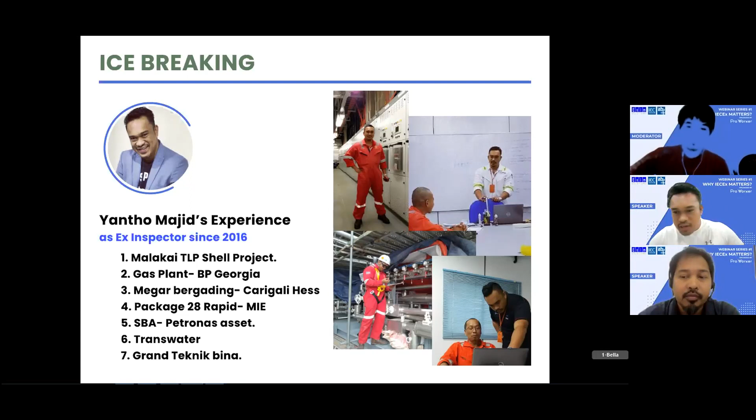Ketika itu saya belum punya IECEx kompetensi, jadi waktu orang-orang foreigner datang ataupun orang-orang yang punya kompetensi itu, kita lihat mereka, wow mereka ini hebat sekali. Kenapa saya ceritakan ini? Supaya kalian berminat. Sebelum kita masuk ke slide seterusnya, nanti colleague saya, Mr. Suhaili, akan terangkan. So everybody, are you okay when I speak Indonesia, English, mix a little bit? Is it guys, are you okay? Okay ya, sounds good.

Jadi pada waktu itu saya merasa bahwa saya sudah cukup bagus, tahu segregation gimana, pulling cable, running tubing dan install of equipment. Nah, pada waktu kami melakukan pekerjaan di Malaysia, waktu proyek Gumusut Kakap, saya melihat banyak bule-bule yang datang, foreign coming to Malaysia, and they have that expertise as EX inspector. I'm also surprised that time because we work very hard, and I saw them also come to site, but they just bring a piece of paper, or they just bring their tools and take photo and then go back to the office. Aku jadi tertanya-tanya, what actually they're doing.

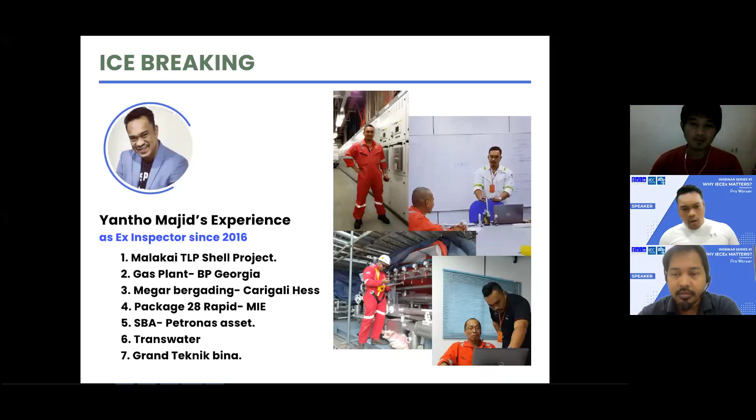Aku tertanya-tanya, apa mereka punya posisi? Kenapa cuma datang di site, ambil foto dan pulang ke office. Waktu itu saya bekerja dengan Pak Gorga juga, yang punya Pro-Workers saat ini, sama-sama waktu itu. Jadi saya mulai tertanya-tanya, dan ya biasa, kita manusia, we are human, we wanted to know. Aku suka bertanya, aku tanya sama bule itu, temanku juga, itu apa posisinya?

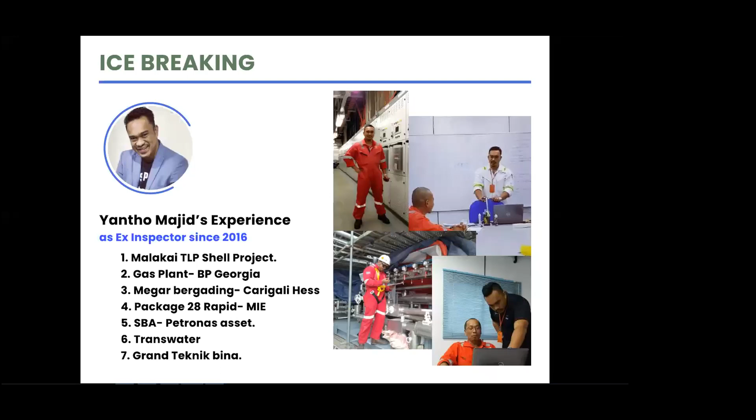Why I encourage you guys about IECEx, is because this will drive you to a place you never thought before. Kalau kalian sudah punya IECEx, I do believe you guys will be in the market.

Yeah, there's Bernardo, there's Pak Jontri, there's a few guys in this line at the moment that have certificate from Australia. They are very valuable in the market. Mereka bisa demand berapa gaji.

Kalau kita yang tidak punya sertifikat kompetensi, kita nggak bisa demand apa-apa. Jadi kalau kita cuma melihat orang datang dan mereka able to do this, tapi kita nggak bisa. Kenapa? It's about competency.

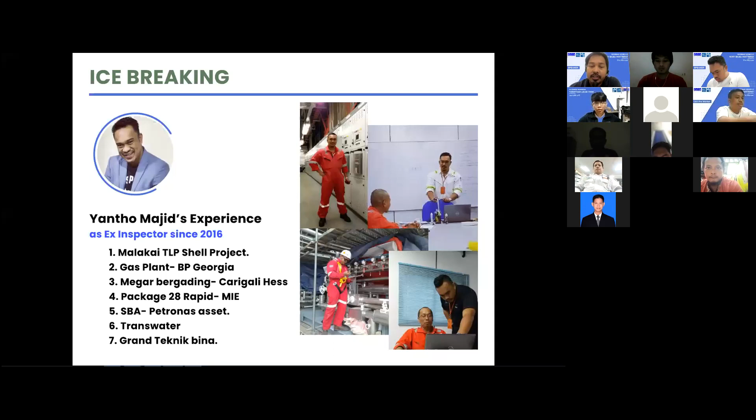Actually, we are the first pioneer of IECEx in Malaysia. Mr. Yantho joined us in 2016, but as a pioneer in Malaysia, I started in 2008. As a pioneer, I did a lot of work to build the IECEx scheme in Malaysia, including assisting SIRIM in Malaysia to build their certification body certifications.

Tonight I'll brief you about the requirements on hazardous areas. As my colleague said, IECEx inspector requirement is growing day by day in today's industry, especially in oil and gas. We see tremendous requirement for that particular position. For the time being, IECEx inspectors are in very short supply all around Southeast Asia and the world.

So before we go into how to obtain the IECEx certification, let me give you an overview of what hazardous area means. As we can see in the slide, hazardous areas are actually around our vicinity, in our day to day activities. You can see this tanker doing bunkering operations of fuel. This process involves flammable substances, whether diesel, gas, gasoline, or whatever substance, involving vapor and gas within that process area or vicinity.

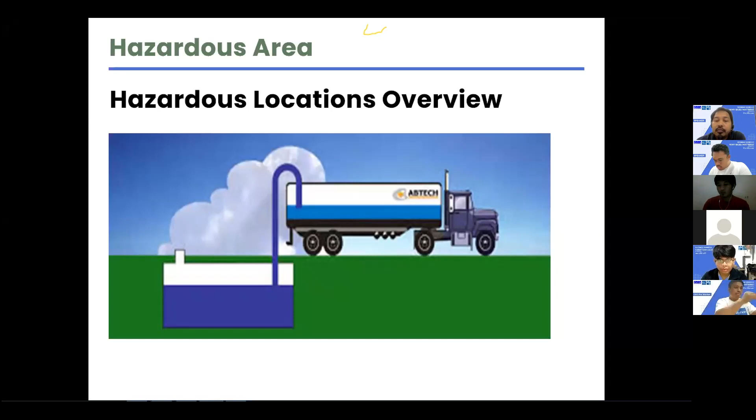If this leads to explosion, it potentially involves industries listed here: oil and gas, drilling, fuel storage, car manufacturing, power generation, distillery, aviation, painting, water treatment, even food manufacturing. If you browse YouTube, you'll find food manufacturing also has potential for explosion in their process, like baby powder or baby milk powder, which can be linked to explosions as well.

This industry will grow, and as Pak Yantho said, the requirement for that particular inspection will grow tremendously. That requirement will increase all over the world, not only in our region. Because why? Okay moderator, next slide.

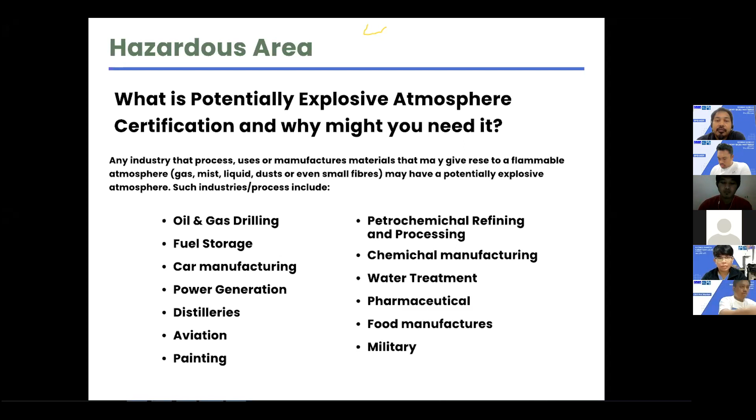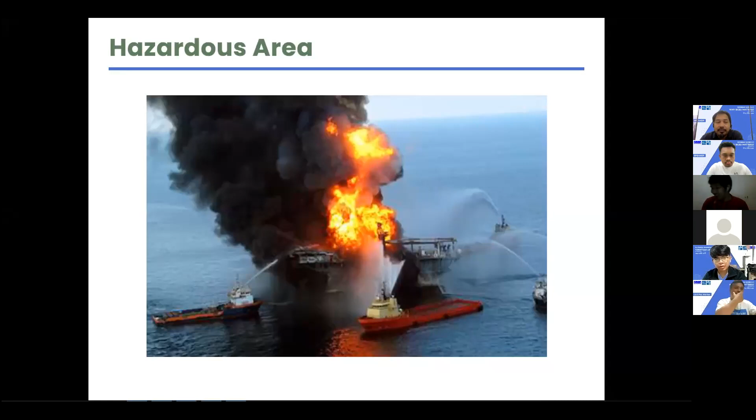Because of small matters, the company doesn't want to pay the EX inspector for the inspection schedule, but that is the cost they will have to pay about the disaster. This is why, as Pak Yantho said earlier, the EX inspector is getting high paid for that particular expertise, because the plant owner or company wants to avoid disaster, and they also want to avoid the loss of capital - the money matters.

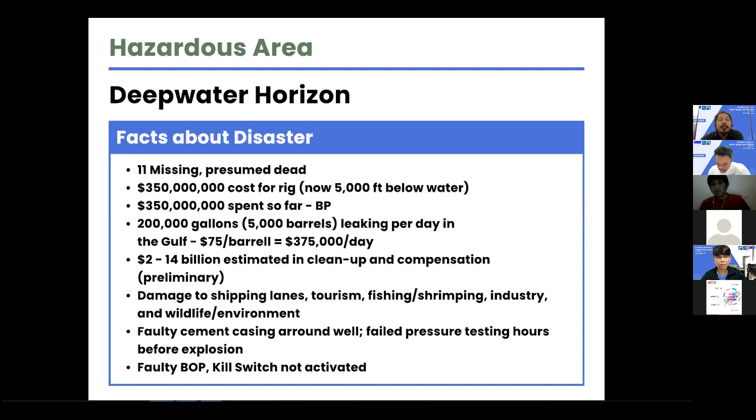Okay, all right, the next slide.

That's why we need to understand the fire triangle in basic safety concepts. The concept is we need to eliminate one of the elements to break the triangle. So this EX explosion or EX protection method is about how to mitigate and control this fire triangle through engineering practice or engineering design.

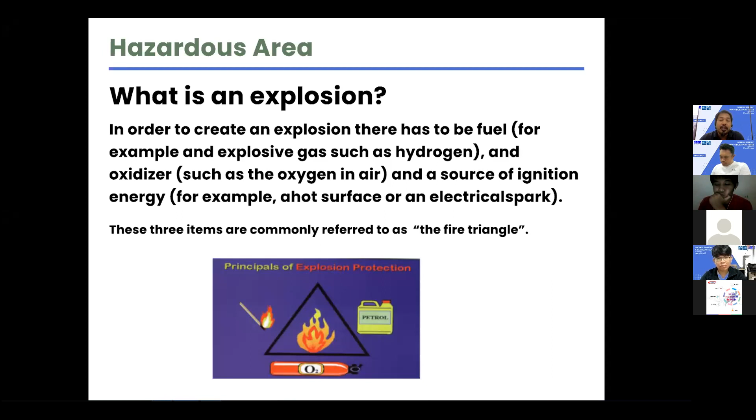All right, because of the physical properties of the flammable substance, they have a lower and upper limit level. For example, LEL - if the presence of the vapor or gas is not sufficient in the atmosphere, ignition will not happen. This is the meaning of LEL. It means that even if the fuel is present in that area, if the amount is very small, the ignition will not happen - there will be no fire.

Okay, that's what LEL means. Then we go to UEL, upper explosive limit. This means if you have the flammable substance but the concentration is very high, this also will not lead to ignition happening. It means if the fuel content is too concentrated or the concentration is too high, it will eliminate the ignition - there will also be no fire. This is a basic property of the material itself, something you need to understand beforehand - why this flammable substance behaves like this physically.

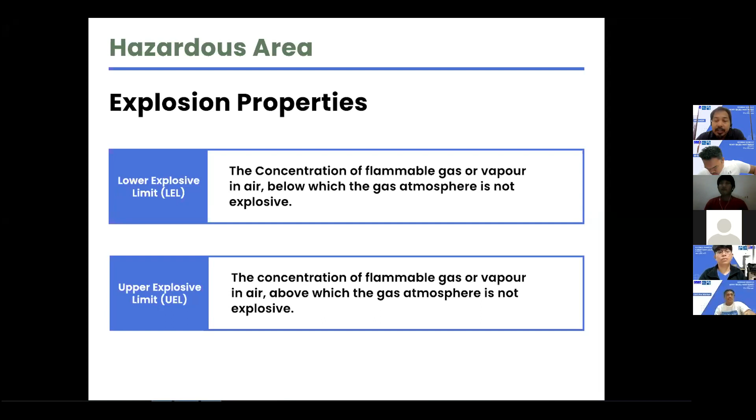This means if we have several materials or several types of gas present in an area, these have already been studied physically by physicists - the LEL and UEL of each compound is different between them. This is a particular value already studied by scientists or petrochemists.

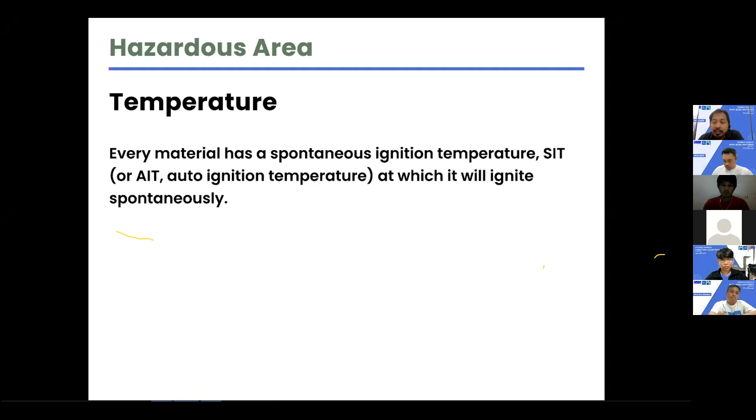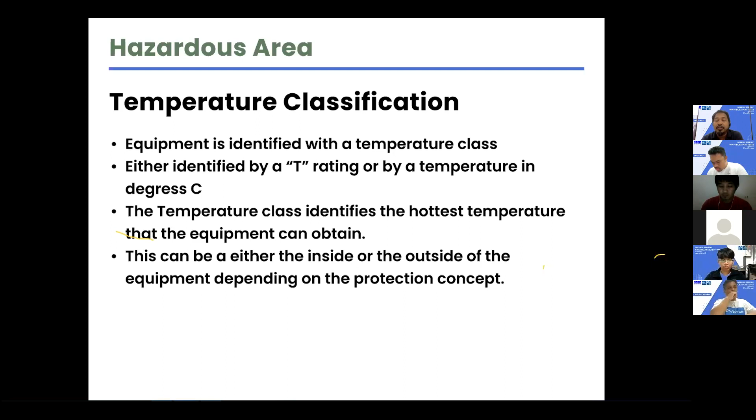Okay, this is a particular of temperature rating. We call it hazardous area classification. Before that, we need to identify the material, everything in our process area. That's why we need to do this system, we call it hazardous area classification.

We can see T1 here. T1 will be referring to 450 degrees C or 842 Fahrenheit. This will be classified as what the gas type or material type will be in self-ignite, or AIT, at that ratio of temperature. It's the meaning of T1 of the hazardous area code.

And so on, we have T2, T3, T4, until T6. T6 is ranging from 85 degrees to 100 degrees C. This is a very flammable material actually. If that hazardous area is classified as T6... but in actual process area, we rarely see hazardous areas classified as T6. Normally we use T3 or T4.

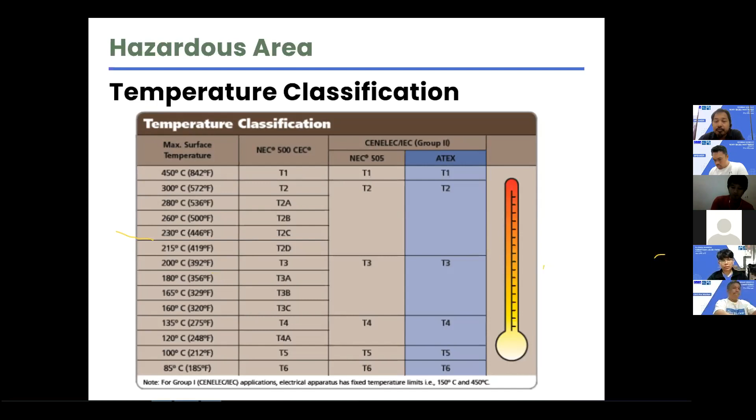Okay, next slide. This is a typical temperature class that will be classified by petrochemists. This will be referred to IEC 60079-20. If you refer to the standard, you can get this particular information in the standard as well. This particular standard you can refer to.

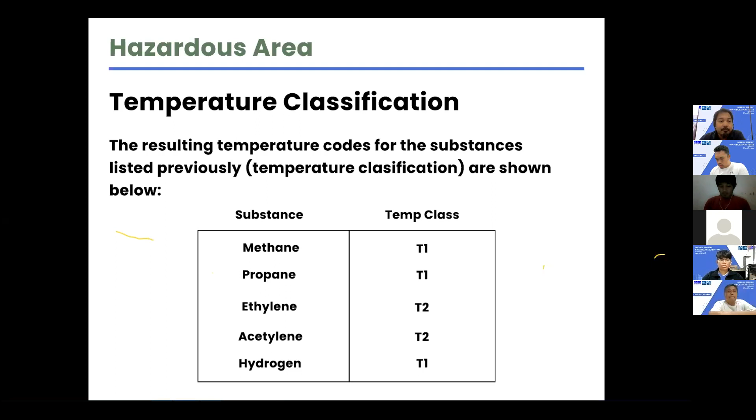Okay, next slide. Beside the temperature class, if you have a gas area, where the process plant involves gas or vapor, normally the hazardous area classification will be separated into subgroups, or we call it gas grouping. We have group number 2, group number 3, and group number 1. For group 2, we divide into 3: 2A, 2B, 2C, which means the group bearing, or what it means, depends on its own subgroup.

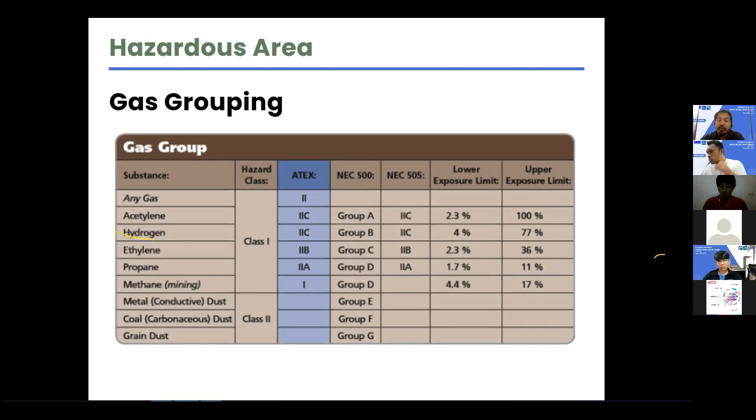Also, some element to consider is the energy level of this substance - how many joules or how much energy level is required to ignite this material or gas. This is only a basic explanation. These are only basic explanations. If you want more detail, that will be explained during the training if you enroll. We can elaborate more on how they simplify or group this hazardous area. Okay, next slide.

For summary, how this gas group will be classified or segregated is because of their risk tendency. As you can see, gas group 2C, 2B, and 2A - 2C is a higher ranking. Because of what? Because of, as you can see down below, the energy level and the LEL and UEL. This means gas group 2C has more tendency to ignite, even though the environment condition there will lead to explosion risk.

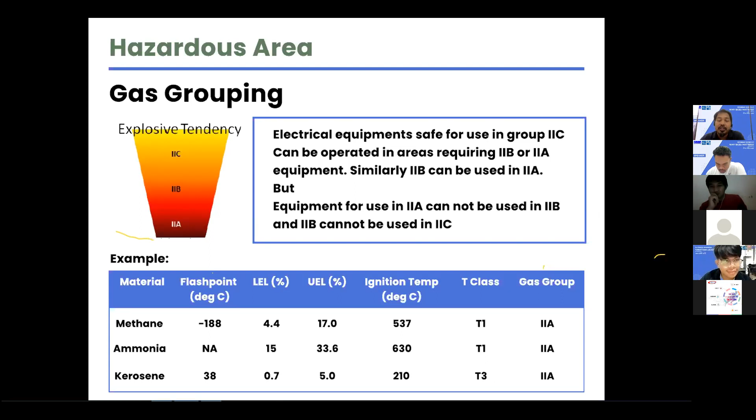Then the risk is more reduced when the material is grouped in 2B, and even less risk when the material is classified as 2A. This can also be elaborated during the training as well, how they classify this. In this seminar I don't think there's enough time to elaborate more. Not enough time to elaborate more actually. If you ask questions, we can do some basic summary explanation. Okay, next slide.

All right, area classification - last but not least, we call it zoning. Why do they classify it as zoning? Because we want to identify the critical risk of this area. You can see in the slide here, we have zoning, character number - Zone 0, Zone 1, and Zone 2. Zone 0 means that particular substance or gas is present continuously in that area - it means all over the area, the material or gas is present there.

Then for Zone 1, it could be present intermittently, which means sometimes it's there, sometimes it's not there, like that.

This calculation must be done by the engineer. That's why they classify it there.

Zone 2 has less risk compared to zone 1 and zone 0. In zone 2, the material or gas is present abnormally. Normally the material could be present if something goes wrong in the process, like a leak, or in a place adjacent to zone 1. This will also be classified as zone 2.

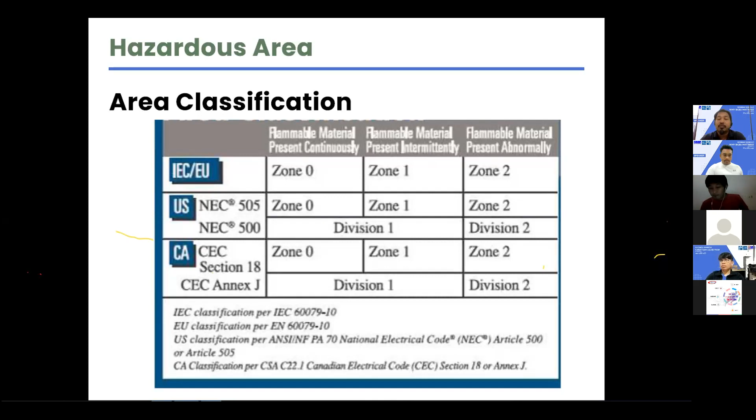This is why this area classification must be established in the plant. Remember, we need to address safety first, and this should be one of the safety parameters we look into.

We have the class and division system. As I said before, whoever is familiar with the NEC system knows it could be class 1, division 1 or 2. Combustible dust is a different class, class 2, division 1 or 2. Flying fibers and combustible dust might be found in the coal mining industry, food industry - like I said before, the meat industry - and flying fibers, this might be the cotton industry as well.

And then the zone system - this system is used particularly by IECEx. For gas, mist and vapor only, the particular zones are zone 0, zone 1, zone 2, and for dust we use zone 20, 21 and 22 as listed below.

This is the subgrouping, as I told you before on the previous slide. It's a hierarchical system chart showing how the group is subdivided. We focus on group 2, which is more towards gas and vapor, while group 3 is more towards dust industries. Because of oil and gas, we get more involved with this subgroup, group 2A to B to C.

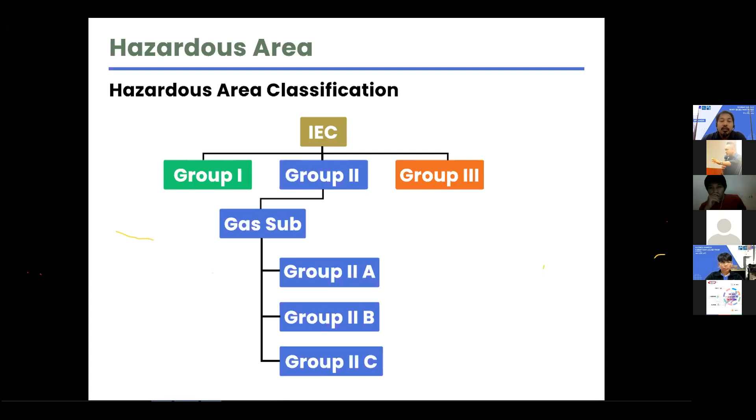This is a summary. If you go up through the training, this is the particular engineering control established by IECEx, or how to achieve risk control through engineering practice or engineering design.

You have many equipment types on site, especially electrical and instrument equipment. You can see explosion-proof equipment, which we commonly call EXD. This particular equipment eliminates the spark or energy level that could ignite the hazardous area.

As we understood before, your particular area might be classified as zone 0, zone 1, or zone 2. This particular equipment is suitable for zone 1 and zone 2 - it has been designed to cater to the risk in those zones. That's what we call explosion containment, a method of general principle.

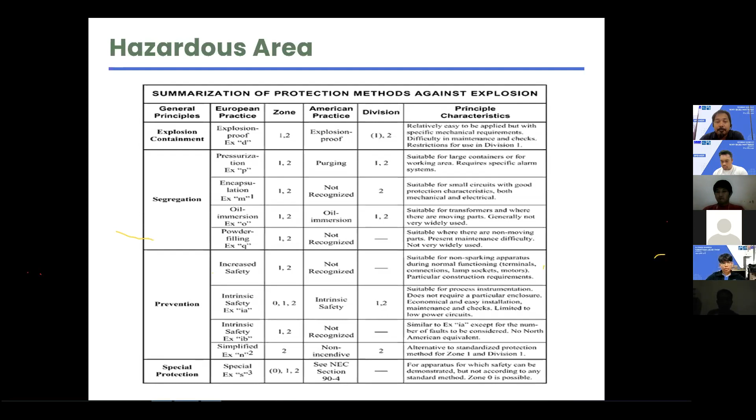Okay, next slide - this is a particular equipment actually. Right, we go to the IECEx scheme. Once we know the equipment or hazardous area requirement, then we go to this IECEx scheme. What does IECEx scheme stand for? What does this scheme actually do for us or for the industry?

Actually, this scheme is established to address manufacturing and the standards - how the manufacturer needs to get the standard reference they have to use, and then maintain the originality of the certificate. This is very important because in the market now we have a lot of so-called Ex certified equipment, but some equipment only follows their particular country's standard. Let's say we have China-made motor, but that electric motor is manufactured or designed according to China standard, which might not be accepted by other countries. The IECEx scheme overcomes this particular problem.

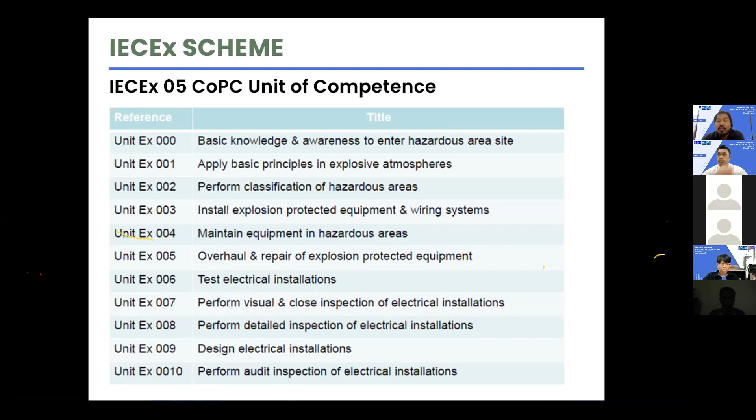Different competencies are also offered by the IECEx scheme. Unit 002, perform classification, is normally for design engineers and for design of electrical installation - I obtained this unit once because I was doing electrical installation design, so I required this unit. And then there's unit 010, perform audit.

Now, limitation of scope. As explained in the previous slide, there are different types of protection: Ex d, Ex e, Ex s, Ex i, and so on. For obtaining this certificate, you can select the type of protection you are familiar with. Let's say you're only familiar with 3 protection types - you don't want to obtain all these protection types because you need to learn more theory on how that equipment needs to be constructed, inspected, and installed. So you can select, for example, Ex d, Ex e, and Ex i - 3 items only - and then you can select these on the particular assessment.

Also the product type - let's say you are familiar with rotating machine or switchgear, you can select this type of machine, type of product only. Group also we can select; normally in oil and gas industry, we can select group 2 only, so the question of the assessment will not include mines and dust. And then the limit of range of voltage - this means if you're not involved in high voltage industry, you don't have any familiarity with high voltage industry, you can select only low voltage. Then the question on the particular examination that you want to apply will be limited to the familiarity of your experience actually.

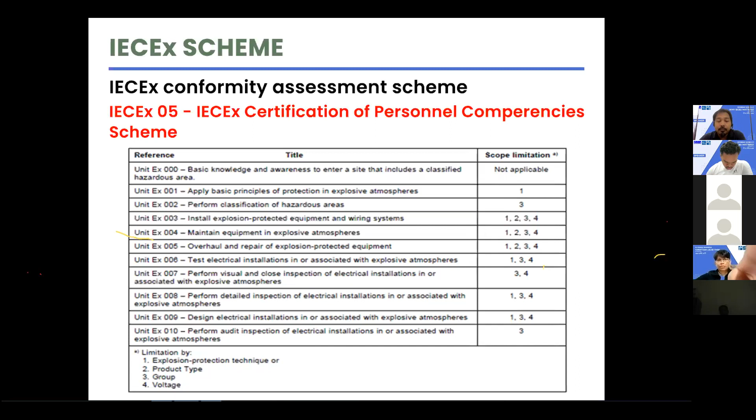Next slide. Okay, what is the assessment criteria actually? As a pioneer in Malaysia, we have done this assessment quite extensively since I have been involved in this IECEx assessment from 2012, and we worked with a few CBs. Then we know how to prepare the candidate, what performance criteria needs to be achieved before you go to the real assessment.

The first element is you have experience or knowledge of how to prepare work in a hazardous area. Number one is nature of explosion hazard - you have known from the previous slide that we told you about the fire triangle and everything. This is useful information. What is a fire triangle actually? That will be asked in the examination. How about the critical aspect of evidence - let's say you have conducted the work permit and clearance procedure and SOP, everything. This is a general requirement on this particular competency assessment.

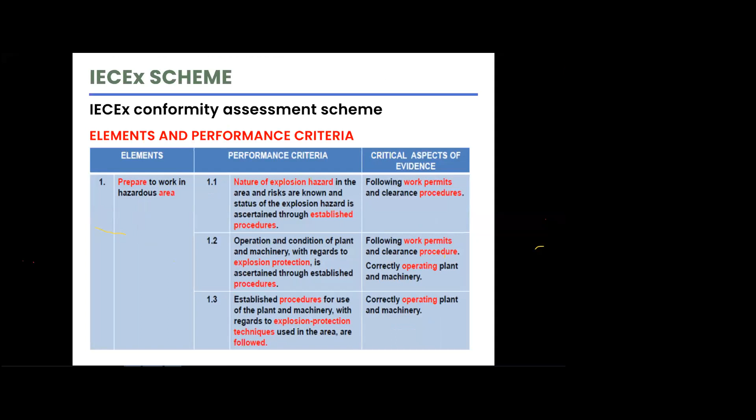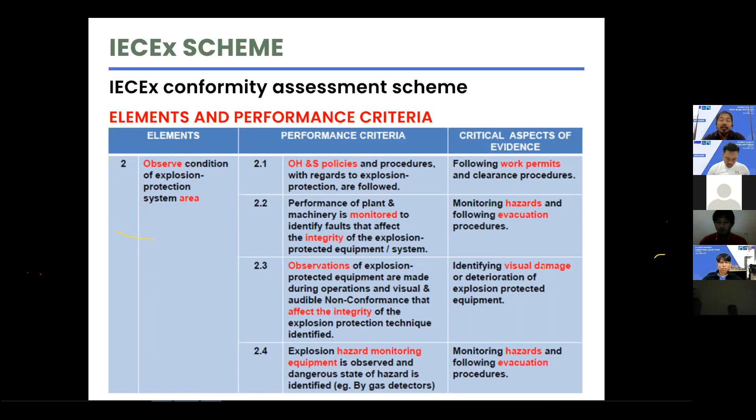Right, and then the second element is observe condition of explosion-protection system area. This could lead to item number 3 from the first previous slide. 2.1 is occupational health and safety policy at that particular company or country - this might be different at a particular company or country, so this must be fully addressed during the assessment. You have the ability to observe what happened at this plant - even though, let's say you go to a plant and you find that this plant has no isolation permits, you have to establish the isolation permit. This is what we call a competent person doing for the industry, because you have the knowledge, you have to advise the plant owner, you have the competency, you have to advise the company how to establish the correct procedure to operate this plant in the correct manner according to IEC standard requirements.

And then the last element is to take action to limit the risk. Let's say once you are doing the inspection at a particular plant, company or project, you find that a particular installation is not meeting the standard requirement. What action do you have to take? It must be the correct way - you have to present your knowledge with a correct proposal to the plant owner or the company. This will be referred back to the standard itself. If you give some recommendation that is not aligned with the standard, you shall have a problem during the assessment, because you are not giving the correct solution according to the standard requirement. Okay, these are some elements of criteria you need to fulfill.

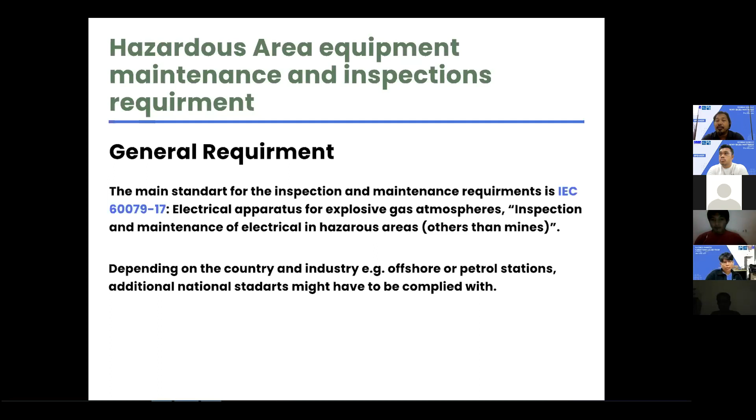Next slide. What is the requirement for Ex inspection? It's segregated into 3 types and grades of inspection. Number 1 is initial inspection, number 2 is periodic inspection, and the last is sampling inspection. The standard segregates these types to normalize and manage inspection properly, because different grades of inspection are required depending on the method and the type.

Number 1 is initial inspection, meaning the equipment shall be inspected before it is brought into service. For example, if we have a new plant project, before that new plant starts up, all the equipment shall be inspected by an Ex inspector according to the IEC standard, to ensure the equipment operates in the correct manner per the standard requirement, specifically part 17.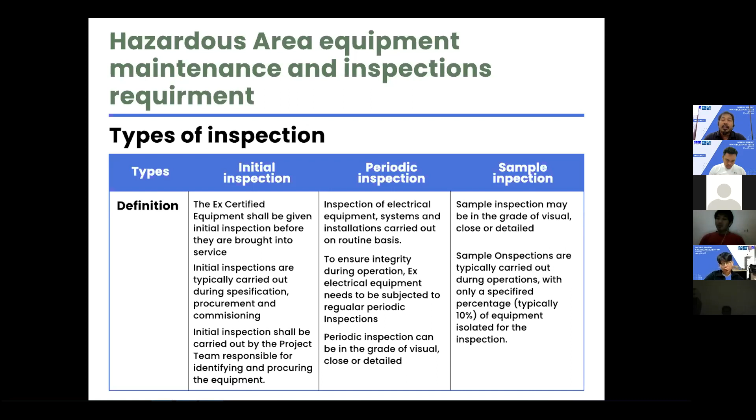Visual inspection means we just use our naked eye to identify defects. We find some defects on the equipment, for example a missing bolt - we can see by naked eye that the bolt is not installed on that particular equipment. Or a puncture or crack on the enclosure. This we categorize as visual inspection.

Close inspection means we need to assess the equipment with a particular touch by our hands. We can identify that an installation could be loose or not appropriate as per standard installation. Let's say the cable gland - from the naked eye visual inspection, we saw the gland is already installed. But when we touch it, we feel the gland is not installed correctly as per standard requirement, since our inspection found it's loose. This means close inspection.